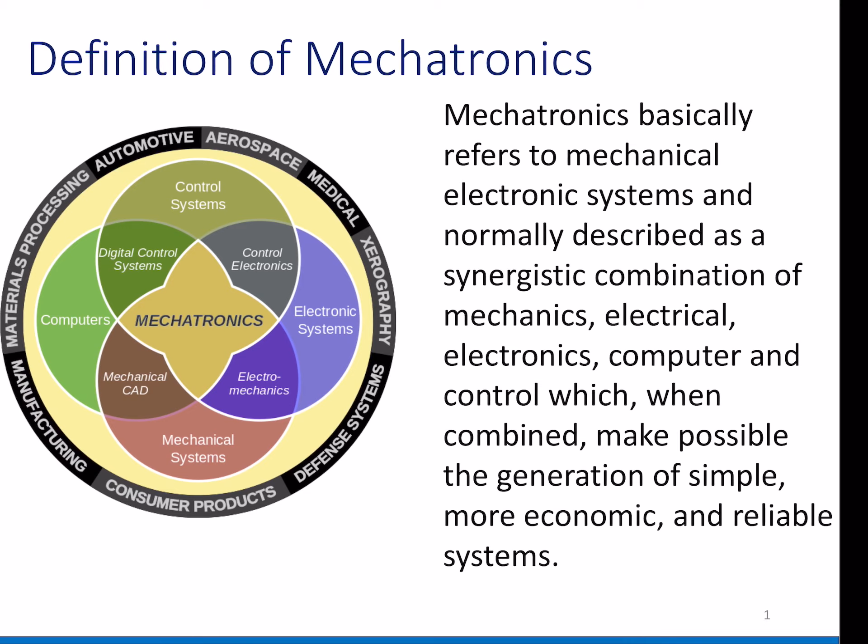Can I edit something here? Let me. Okay, right.

So we have 4 cores: control system, computers, mechanical system, this is what we have learned, and we have electronic systems. Normally in the past we have only this. I would say these two are quite close together, control system and computer. For control systems, we also require some programming and algorithms.

So in the previous time we had only these 4, I would say 3 cores. We have computers, we have mechanicals, we have electronics. And then in the past 5 or 10 years, we're starting to learn about robots and some new controllers. When you build a robot, do you think we can use only mechanicals, or only computers, or only electronics?

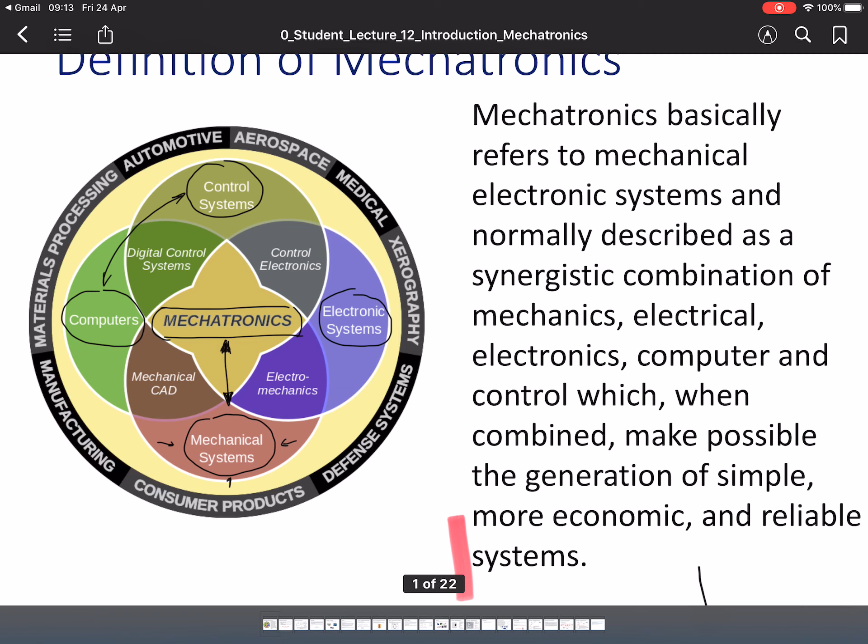on the right side it says mechatronics basically refers to mechanical electronic systems, and is normally described as a synergistic combination of mechanics, electricals, electronics, computers and control, which when combined make possible the generation of simple, more economic and reliable systems. So in a later slide I will also show you how this

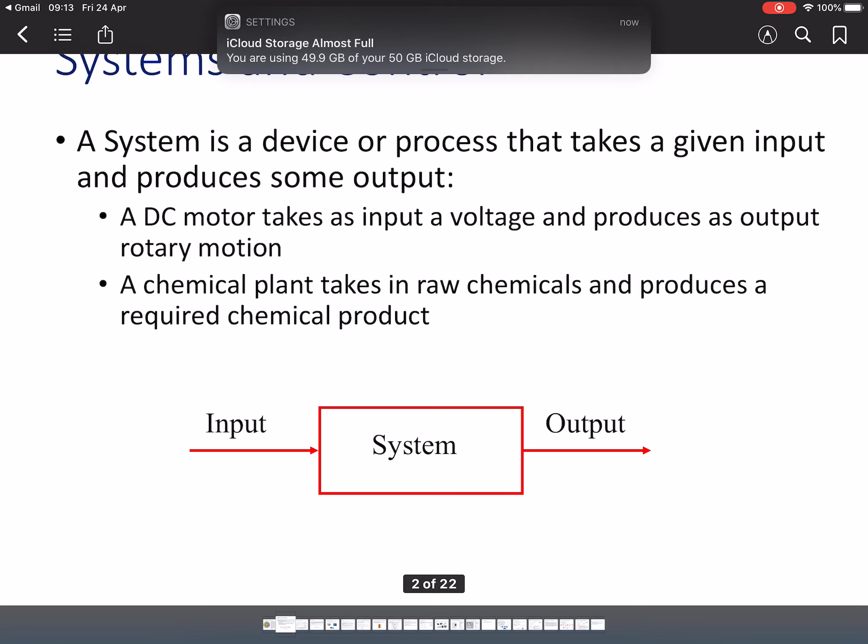How can I make it disappear. Alright. Oh, so this one. Right, so

And we have system and control. First, what is a system? What is control? A system is a device or process that is given an input and produces some outputs. For example, DC motors. Do you know motors?

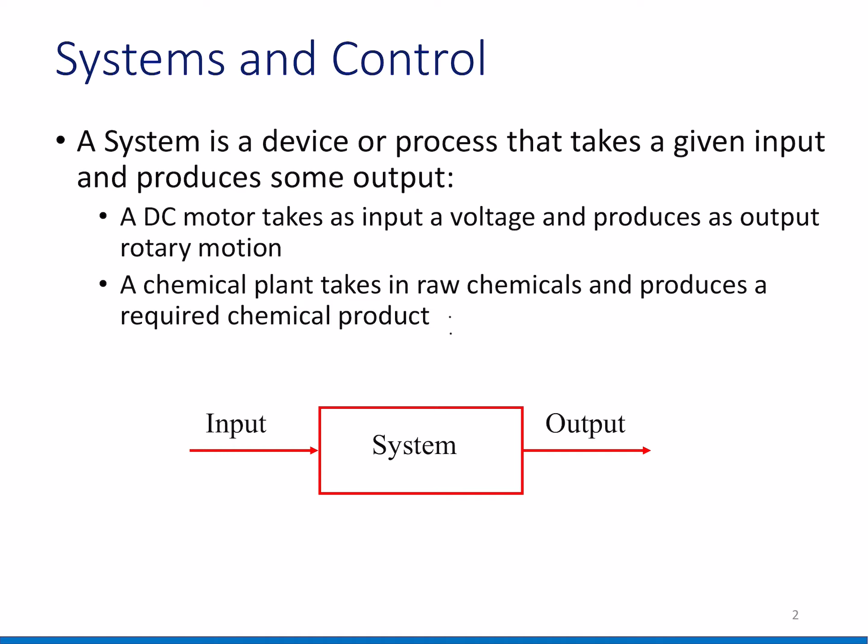In the car we always have combustion engines, and it also acts like a motor, but not really the same. But have you ever seen motors? Maybe in the past you know Tamiya, the car that kids play with, or not only kids but teenagers also. So we have electrical motors, with plus and minus signs here, and we connect them to batteries. The battery energizes the motor, and the motor rotates.

So what is the system? This one is the motor, and the input is voltage, and the output is rotary motion. So this is called a system. A system is what you give input to and then you get output. But it doesn't mean you have only motors here. I will show you later. It's not only these systems.

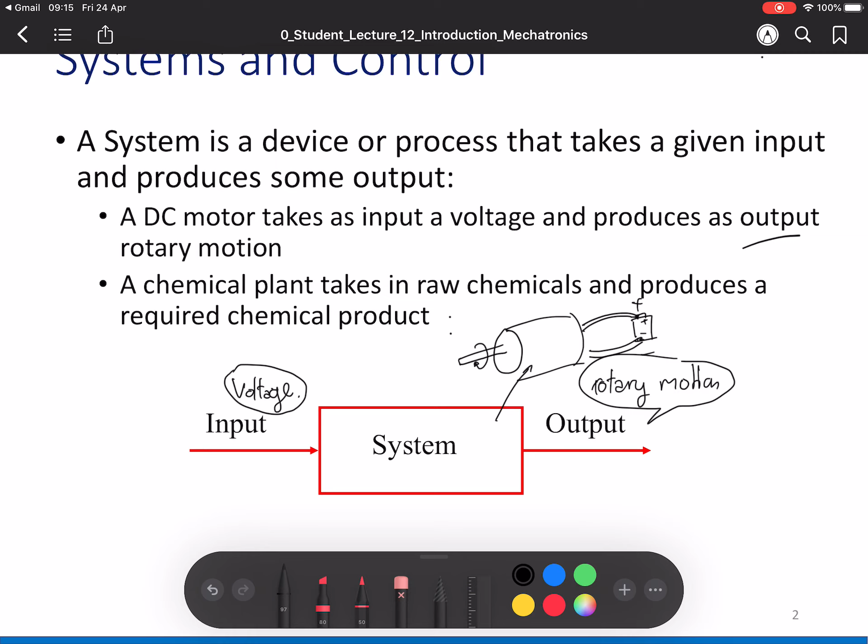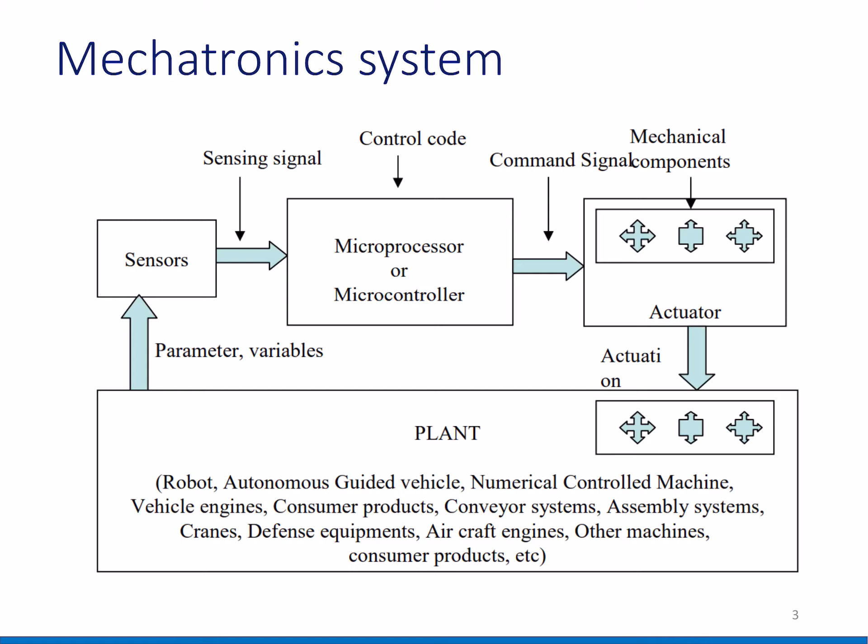Alright, then next page. So what about mechatronic systems? A mechatronic system is a little bit more complicated, but not really hard to understand. So for example, how do we start? For example, air conditioning. We have rooms, we have air conditioning, right? So we have the aircon, and actually this aircon is this one, also this one, yeah.

So air conditioning has actuators. What are actuators? An actuator is a device that changes one type of energy into another type of energy. In this case, the air conditioning has motors too.

So how air conditioning works is they compress the air to get more pressure, and when you compress it, it absorbs the heat energy, and then it gets pulled outside of the room. So the heat goes out and it makes the room temperature go down.

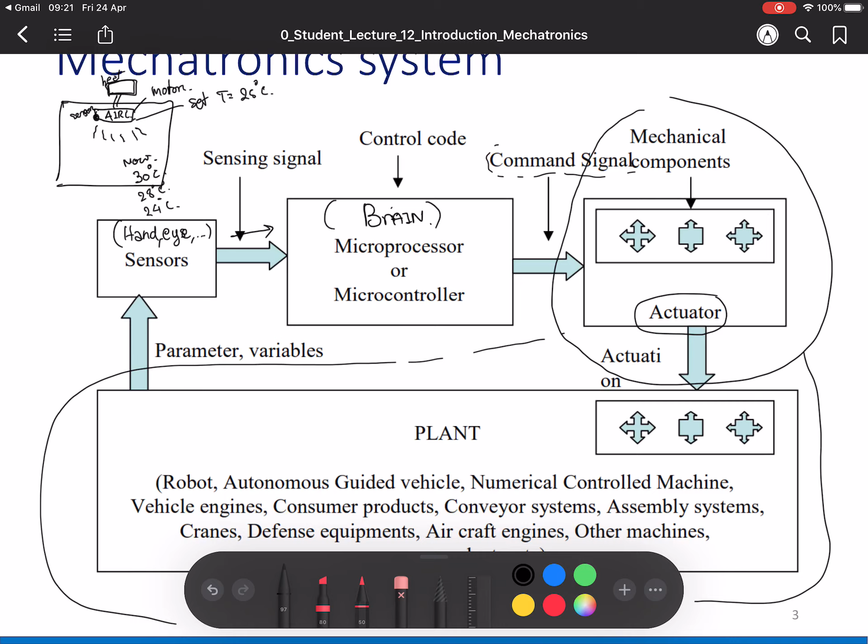And next, we have controllers. So controller is the device that acts on the error signal. So the controller is here. Microcontroller is actually a brain, if we compare it to our bodies. So it's a device acting on the error signal generated to determine the control actions. So they get the signal from the sensor, they're processing, and then they say, okay, just make the room cooler, for example. And the evaluation performed to determine the control actions can be done by electronic signal processing.

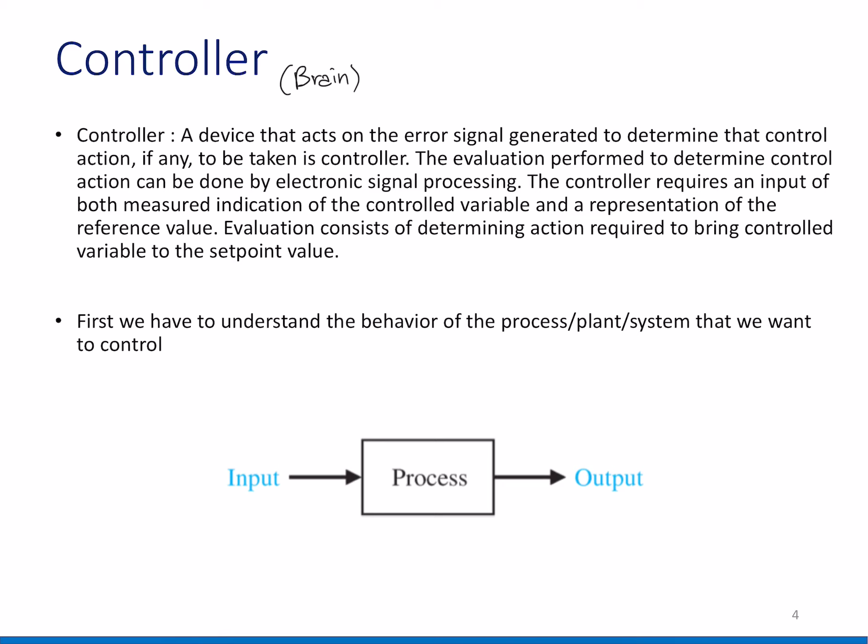The controller requires an input of both a measured indication of the controlled variable and a representation of the reference values. So the controller actually requires two things as an input. Actually, if I write it, so this is a controller. Actually, controller gets one signal, but this signal is coming from sensor and set parameters. This is a sensor. This joint means, for example, this E is equal to set parameters

minus sensor parameter. In the previous case, we set the temperature as 25 degrees Celsius, and then we have the temperature in the room in the initial state as 30 degrees Celsius, then we get 5 degrees Celsius error, as a negative. And then this error signal will be sent to the controller, and then the controller will use this value to control the electrical signal that is sent to actuators. Okay.

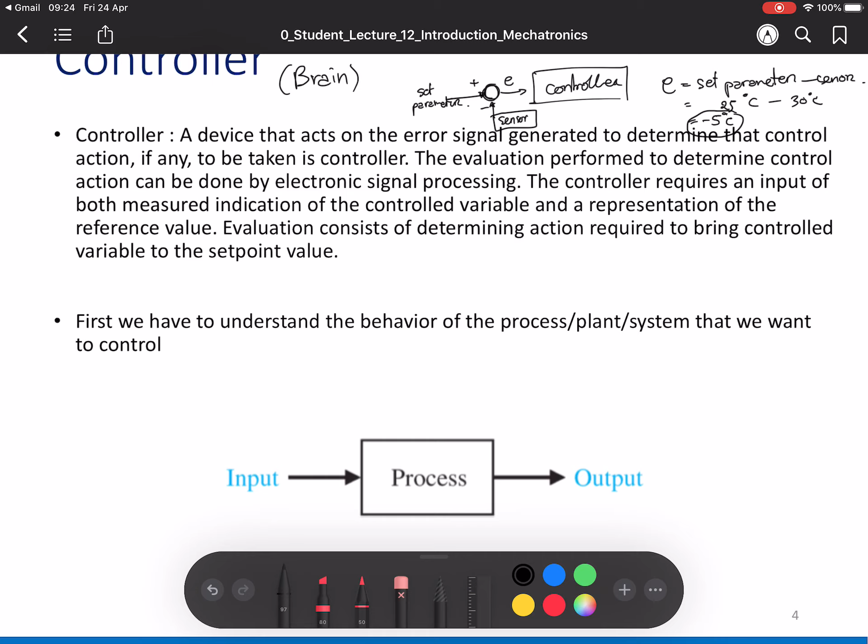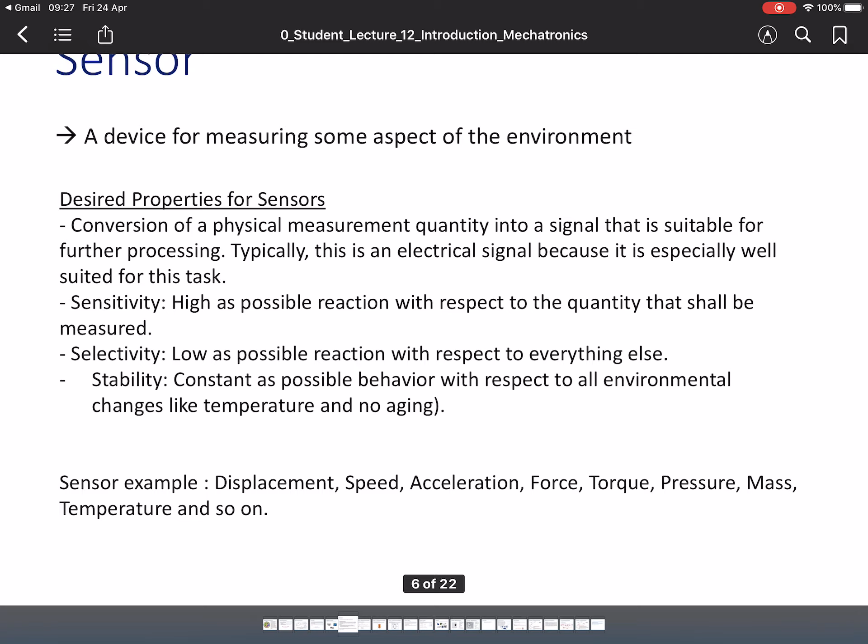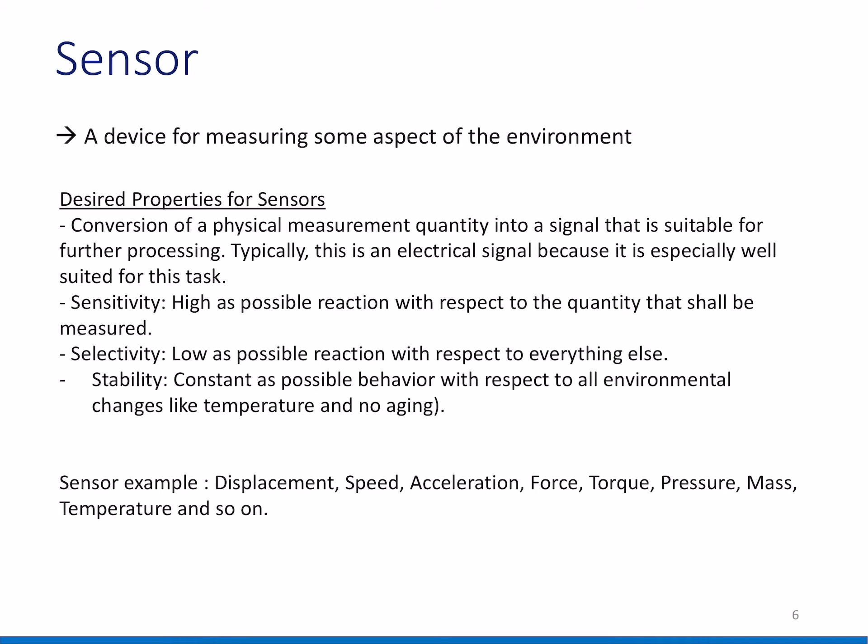Okay, next we have the sensor. In this case, the sensor is a device for measuring some aspect of the environment. This is a property of the sensor. Let's get into the sensor property first.

The sensor is conversion of the physical measurement quantity into a signal. It's not changing the properties, it's measuring the quantities, for example temperature, speed, or displacement, or sound, or wave, or whatever. It measures the physical stuff and then changes it into a signal, and normally it's changed to an electrical signal because it can be easily put into the microcontroller or computers.

And then we have sensitivities. What is this about? Sensitivities should be as high as possible, because it will get better reactions with respect to the quantities that shall be measured.

For example, you have a displacement sensor, and then it will give the signal. Another one has high resolutions, high sensitivity, meaning it can sense really good. Maybe I'll change the example here, might be better with temperatures.

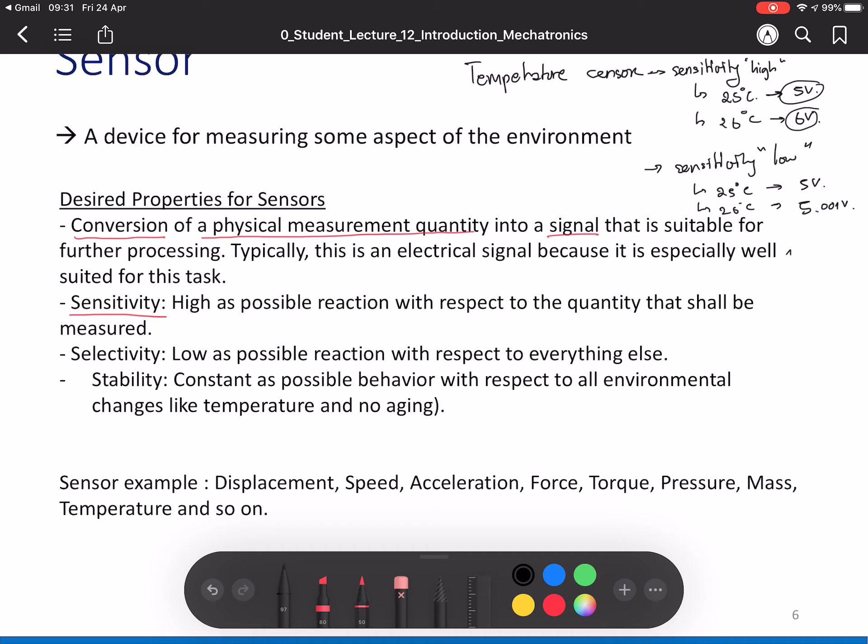But if it's 100 degrees Celsius, maybe you get 6 volt. It doesn't mean it doesn't work, but it will not work well if the difference between those two temperatures is too low. The voltage difference is too low for the microcontroller to differentiate the signal, and that's why the sensitivity of this sensor is low.

For example, someone can sense the difference of a temperature change really well, but someone who has a problem with their nerves won't feel anything, so they cannot differentiate a temperature change of 5 degrees Celsius, for example. This is called poor sensitivity.

And then selectivities should be as low as possible. Why? Selectivities should be as low as possible because it relates to everything else that has changed.

For example, if this temperature sensor also has an influence from light, from UV light, or from sound, that's not good, because you would like to measure only the temperature, but the sound or wave or whatever else we don't want to measure is affecting your result.

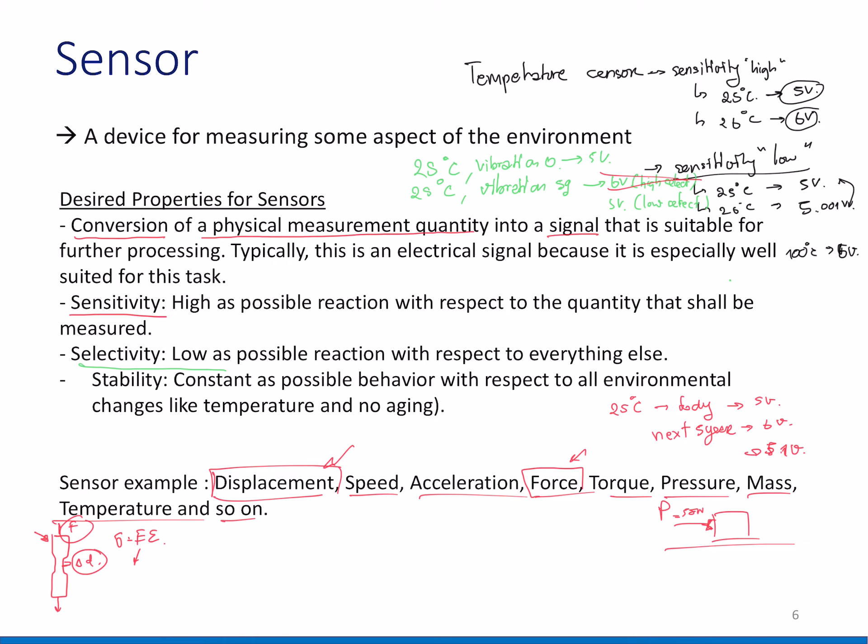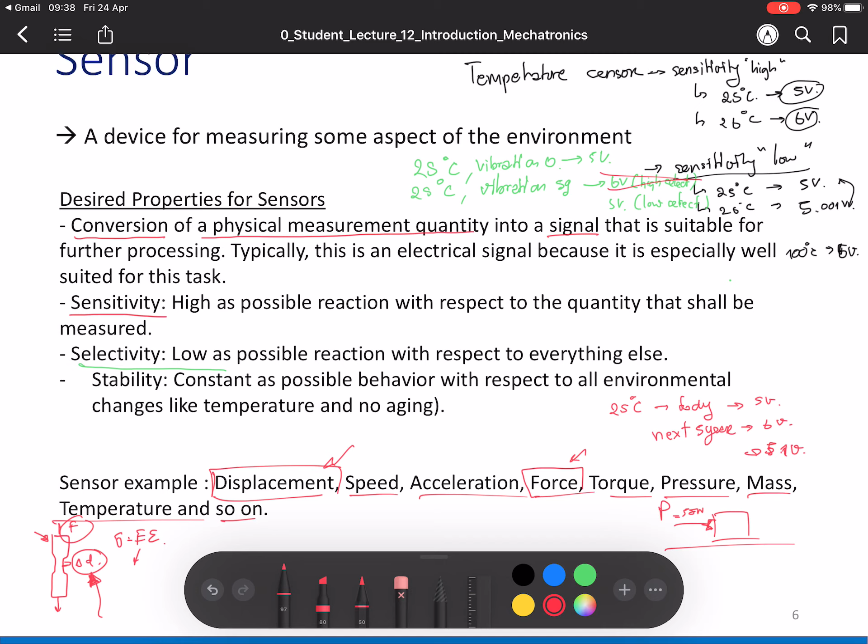So next is the sensor displacement. This one is really interesting. Before we get into this, I also previously talked about measuring the displacement over there on the left below here. So we also measure this displacement. How do we measure displacement? So I will tell you now.

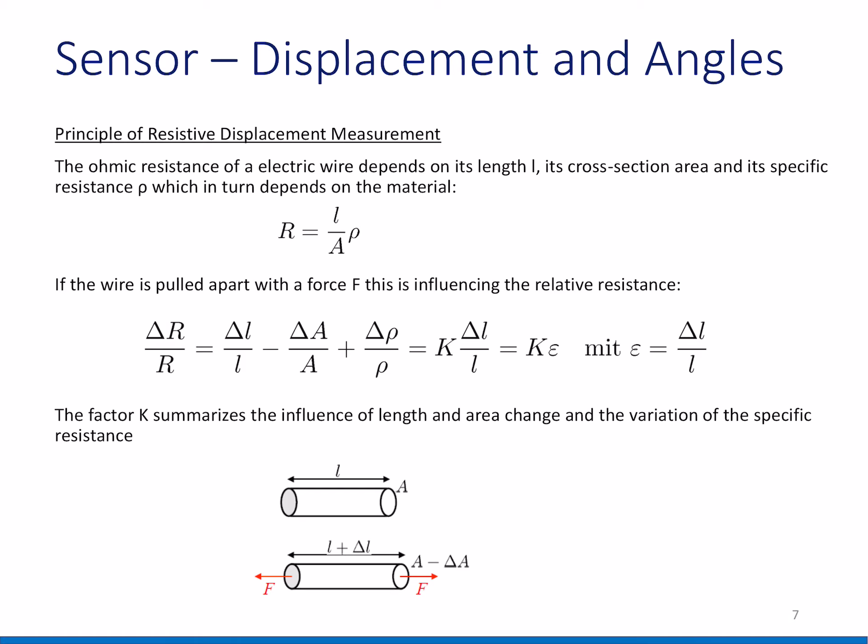Do you know the circuit of the electrical device? Maybe I'll teach you a little bit about this. So normally in an electrical device we have batteries. This is a really simple one, we have resistance, and the battery we say is volt. And V equals I times R, so I equals V over R. So this is the governing equation for this.

So when you fix V and then you change R, then the current is changed. What does it mean, the current changes? You can detect this change by the microcontroller or the sensor. Alright, and how does R change?

So when you have R like this, this is a resistor, and if you pull the force, you remember when you pull it, you will deform this by X, and in the Y and Z axis it also reduces, isn't it? Yes, you remember when you're pulling on the X axis, the other two axes also reduce by the ratio of Poisson's ratio.

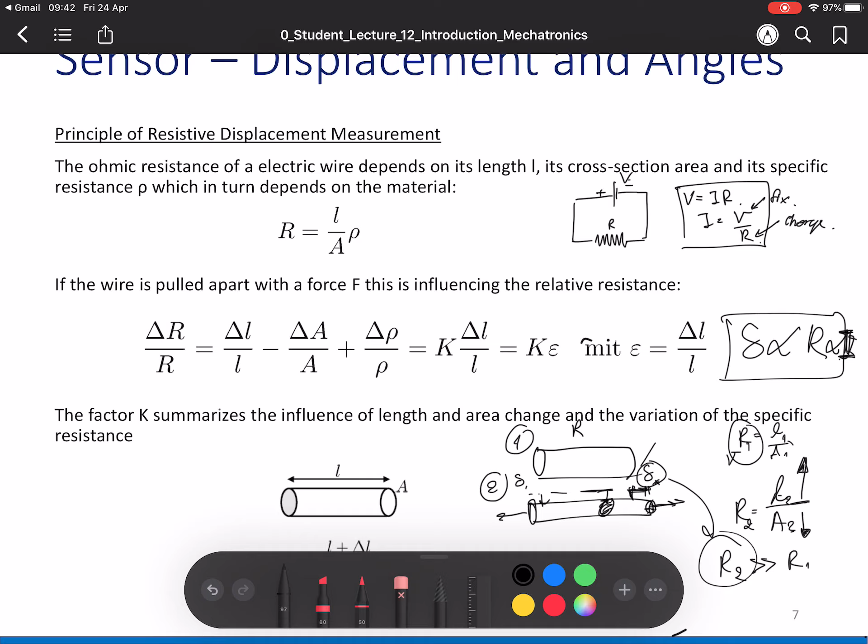So what does this have to do with displacement? It means when you're pulling this as a displacement, the displacement changes R. So it means displacement is also proportional to R in some cases. If the displacement is increased, it means the R is also significantly increased. If the displacement is decreased, then the resistor R is also decreased, and this R is also related to the volt, to the current, and we have a microcontroller to detect the difference in the current. That's why we can detect the displacement.

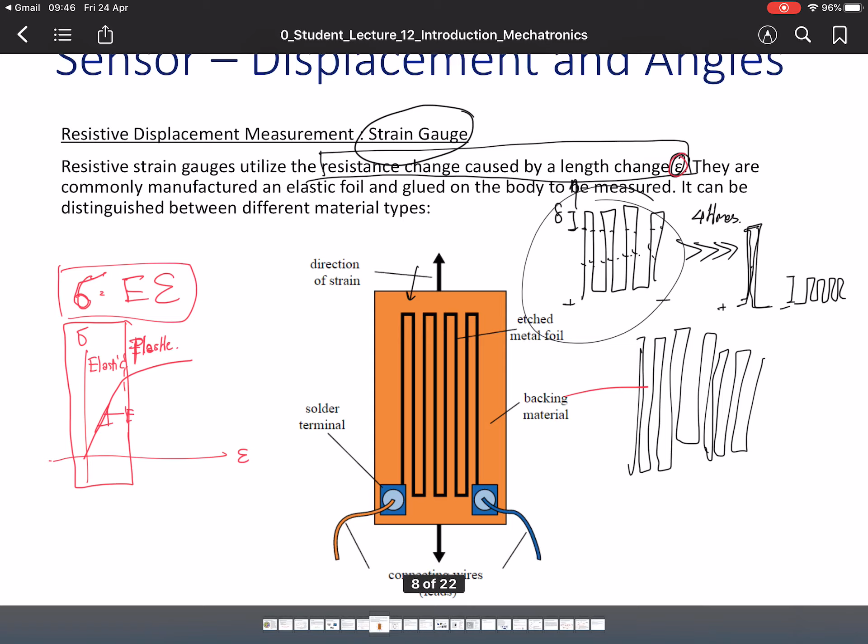So we also have another kind of displacement sensor for angles. It's really simple - we have a light sensor. We normally use this when we would like to detect the angle of motors.

And this 1 0 pattern means you have rotations of this shaft. So this is how the optical measurement, the optical sensor of displacement, works.

So the distance is divided into equidistant intervals whose width determines the resolution of the measurement, and the intervals are counted, with the measurement always relative to the starting point.

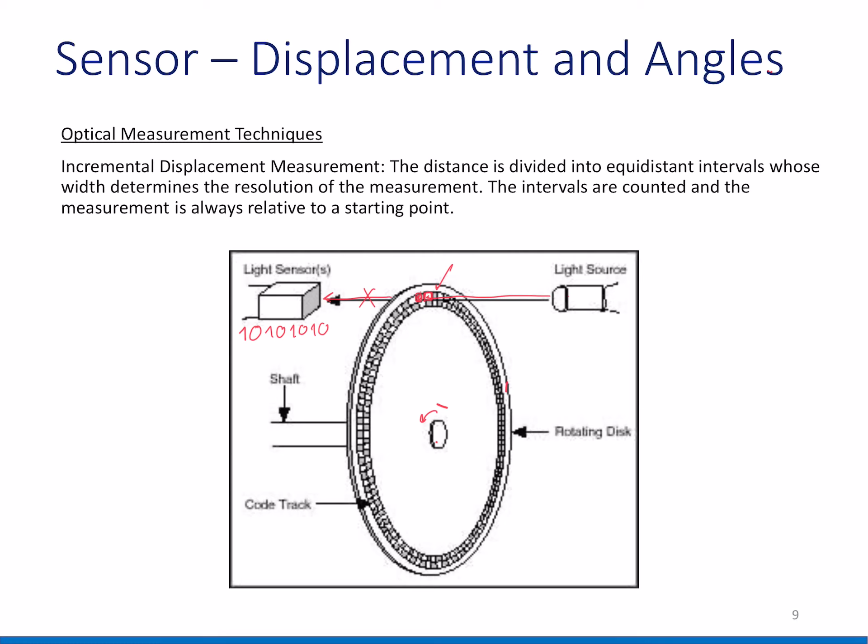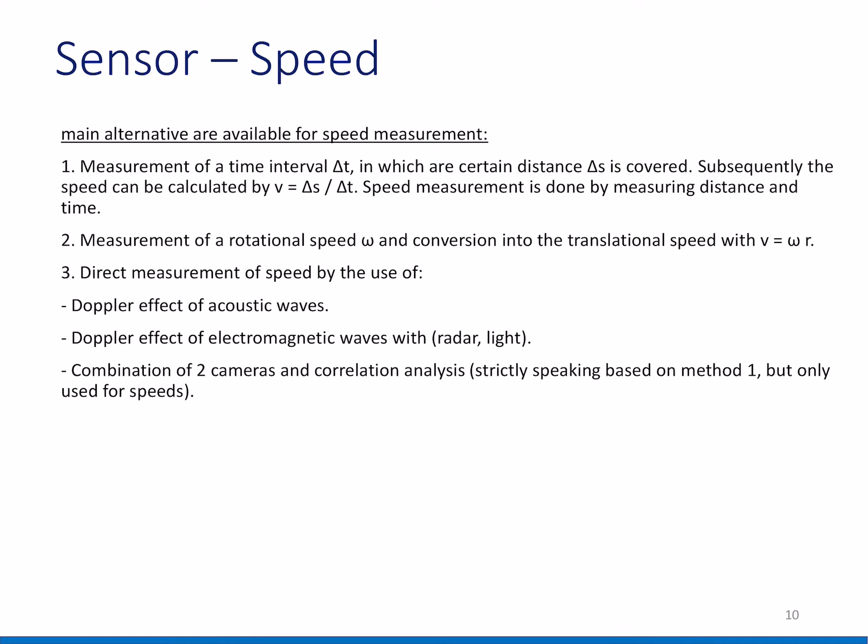And for speed sensors, we have many types. We can also use this sensor, and then stamp it with the time, and divide by the time, to get the speed. There are many types of this kind of sensor - I will show some for you.